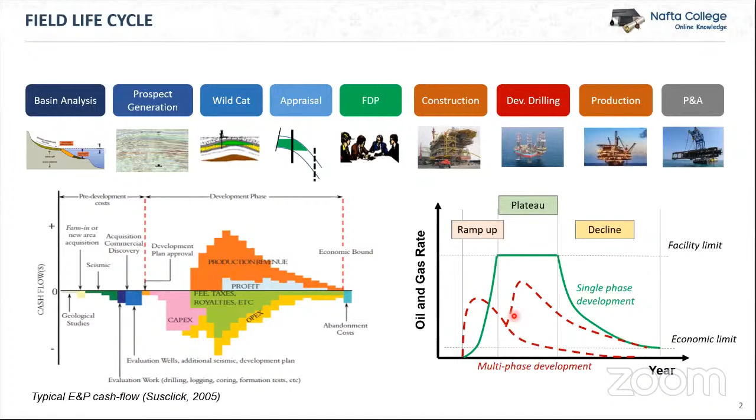So the discussion on reservoir management between the government and the oil company could be tough at some point, because it has to satisfy both interests, the short-term interest of the company and the long-term interest of the government. So there could be different strategies for achieving higher recovery over different time frames between the company perspective and the country perspective.

Reservoir management further tries to move more from the 2P and 3P categories to the 1P category. Throughout field life, as you apply good reservoir management, you will see better performance, so you will be able to book more 1P and more 2P instead of 3P. And that's exactly what defines the company's value in the market.

As you practice reservoir management, you could end up with higher 2P reserves and a higher reserve replacement ratio. You generate more reserves than what you produce, more than 100% RRR, which is good for the company. So you can see how a field operated with good reservoir management and without it could perform quite differently.

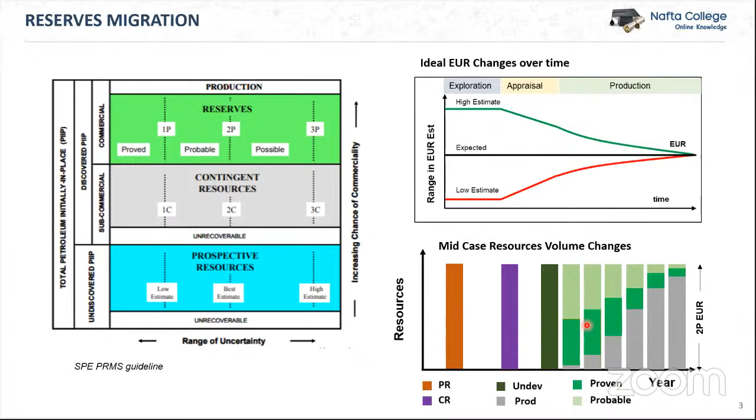Now, the bottom right here gives you an idea that in the mid case, you start with the prospective resource, you drill the appraisal well, exploration well, so you confirm it and it becomes a CR. We don't know if it's commercial or not to bring it to production. Then we go into the FDP, it gets approved, so you transfer the volume, it becomes undeveloped, and you start production. As time goes by, you can see production going up, and the proven getting smaller, but at the same time, it gets transferred from probable to proven. By what? By better field performance. And how are we going to get this better field performance? By applying proper or sound reservoir management.

Now, what actually is reservoir management? If you look at the literature, there are quite a number of definitions of what reservoir management is about. But I want to quote one definition from SPE 26289. They said that reservoir management is the use of financial, technological, and human resources while minimizing the capital investment, the capex, and operating expense to maximize the economic recovery of oil and gas from a reservoir.

So to me, there are three key words when we talk about reservoir management. The first one is about maximum value, the NPV out of the field. So how are we going to have the maximum NPV? Of course, you get the maximum recovery, the maximum reserve, and at the same time, the lowest cost possible. So cost becomes a very important element in the company's value or reserve, because with the low oil price, cost becomes quite a major factor.

And some companies write off their reserves because they don't sustain economic value whenever the price is quite low. Some of the unconventional resources in the US or Canada, for example, because shale oil has a long tail of production, had to cut reserves significantly because at that particular oil price, it's no longer economic. So we have to balance the cost as well as the reserve, with the end result being maximum value. So that's number one.

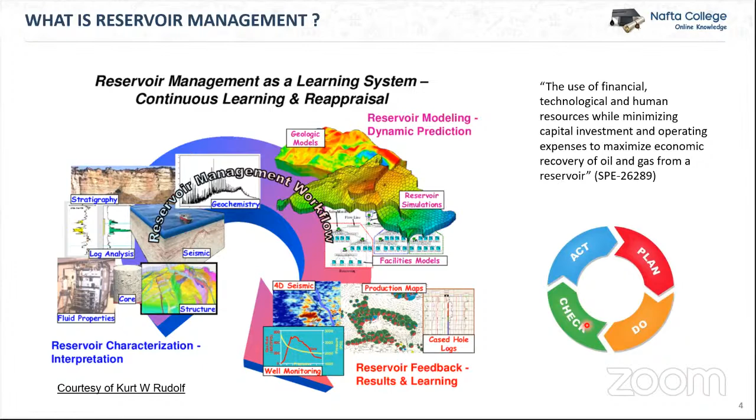Okay, ladies and gentlemen, let me take you through GOR management. This is one of the important aspects of reservoir management, especially on fields that are in a saturated reservoir or at the bubble point. So this becomes a very sensitive or very important issue between the government as well as the operating company, because the operating company's interest, of course, is to produce the oil as much as possible, as quick as possible. At the same time, the government is looking more at the long-term recovery.

And one of the variables to make sure that both interests are served is how you're going to manage the GOR. So the first one, let's say we have a case of depletion drive. So you don't have a gas cap, you don't have an aquifer, it's very weak or no aquifer at all. So normally in Malaysia, for example, the government applies the GOR limit of 1.5 Rsi. So if you start with a GOR of 500, for example, you're not allowed to produce more than 750 scf per barrel. If you produce more than that, you have to shut in the wells.

Why does the government apply this kind of GOR limit? Because they want to conserve the reservoir energy. That's a very obvious intention, because they don't want that when you produce very high GOR, the energy is depleted, and then you have poor reservoir recovery. Now, at the same time, we have to look at the benefit of doing pressure maintenance or the possibility of a secondary gas cap. So if you do water injection in this kind of reservoir, how much is the benefit? If there is quite a benefit, then there is merit for you to control GOR to some extent instead of, let's say, producing unlimited GOR.

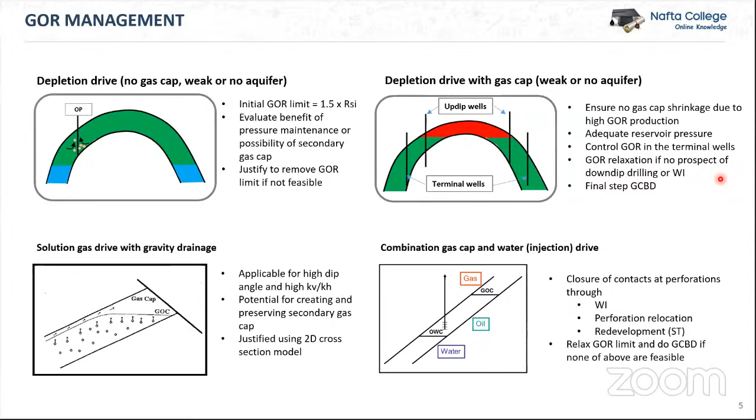Okay, now let's look a bit further at waterflood management. So this is focusing more on the waterflood. Now, in some cases, people say, okay, I want to inject as much as I produce, or in other words, your voidage replacement ratio is equal to 100%. Now, it could be correct for the case that you are in an undersaturated reservoir, there's no primary gas cap, you place your producer well at the top, so you're going to sweep the oil from the oil-water contact toward the crest all the way.

That could be true. But when we deal with a reservoir that has some gas cap, for example, typical of the reservoirs here in the Malay Basin or Sarawak Basin, you will need to allow the reservoir pressure to go down to some point. Why? Because you need to allow the gas cap to expand to push the up-dip oil to the producer well. Otherwise, that up-dip oil will never be produced if you inject exactly replacing what you produce, and you're just sweeping the down-dip oil.

Now, when you allow the gas cap to expand, the pressure will drop. At the same time, you also have to make sure that your artificial lift is able to keep producing the oil at the lower bottom hole pressure. And in some cases in my area, in deep water, for example, we didn't have gas lift, so we thought that the pressure would be maintained all the time, but actually there was a slight drop in pressure that caused the well to not be able to flow because the water cut started increasing. So we had to redo the project with additional gas lift. This is something that you have to think through even in the beginning.

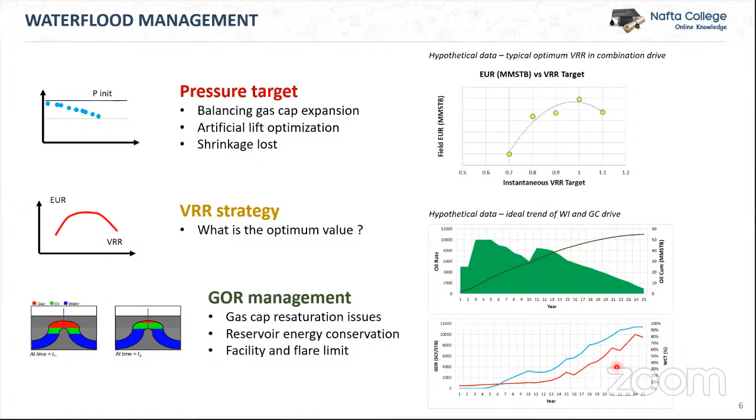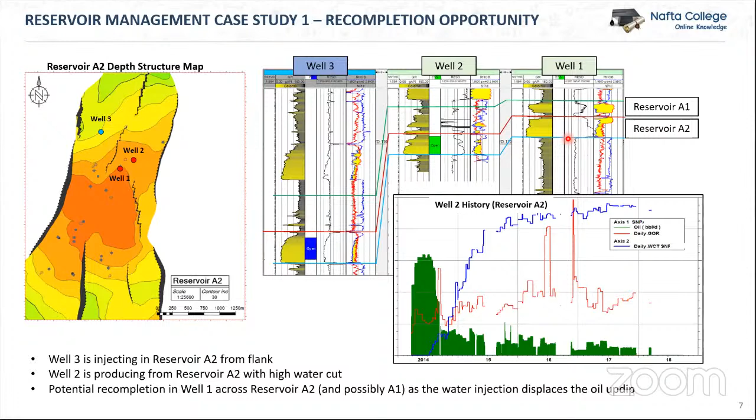And why would the gas cap be shrinking? It can be explained because in the past there was a well at the crest which accidentally produced the gas cap. We didn't know at that time it was connected to the reservoir. It was produced for a few months, then we realized that it's connected and we shut in that particular well. So the shrinking of the gas cap could be driven by that event of producing the gas cap. At the same time, you keep injecting from the flank, which could push the gas cap toward the crest.

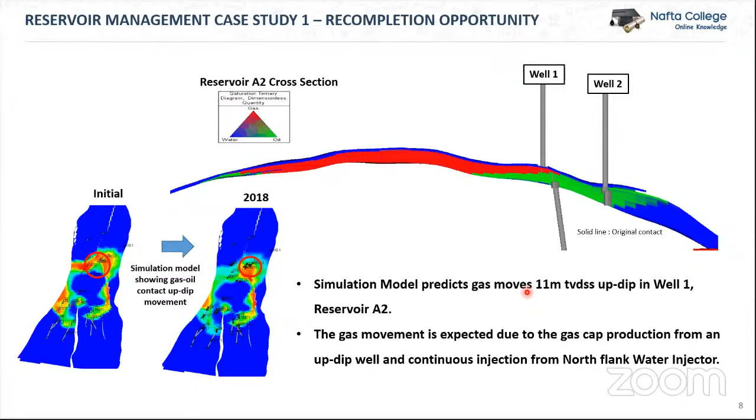So the model predicts that if you complete well number 1, you will have some oil and then some water at the base. That's what the simulation predicted. So then we ran the cased hole saturation log to understand whether it is really gas or oil or even water now in well number 1. So let me just take you through this log a bit.

This one here is the gamma ray. As you can see, you are dealing with quite a nice looking sand. And you can see the original neutron density, which is the gray area on the third track. You can see the separation between density and neutron. The same goes here. So this is your original gas oil contact. On the far right track here, this is the interpretation of the fluid at the original condition.

Then we ran the pulsed neutron tool, which is quite a good tool, to be honest, because we've tested different technologies for cased hole saturation to understand how they behave in the same well, and then we followed up with some action in the field and confirmed which one is more accurate. Now, the first curve that is run in the cased hole is called TPHI, still the neutron porosity, which is based on the hydrogen index.

As you can see, there is an increasing neutron or hydrogen index reading from the original, the gray one, to the purple one. The same goes here in reservoir A2. So there is a change from likely gas to liquid based on the TPHI or hydrogen index log at this particular level. So it could be that now it's not gas anymore from this reading.

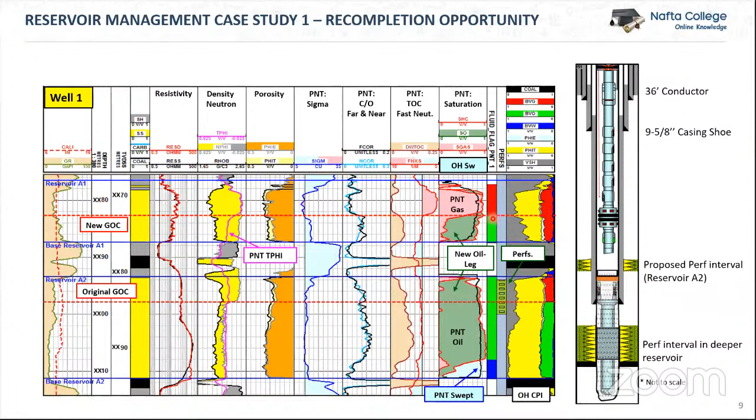So combining the gas identification and the oil water identification, we understand that in the current situation, the GOC has moved quite a number of meters here. So you still have gas left at the top, you have oil, most of it, and then you have water at the base. So with that, we recommended at the time to perforate the section over here to stay away from the water and to stay away from the gas at the same time.

So this is the cartoon to illustrate the original condition and then what you have in the current situation. So the water you've seen at the base, but this water is at a shallower depth compared to well 2 because we believe there's some encroachment or gravity override due to the high permeability at the base. So the gas oil contact has moved quite a number of meters from the original position.

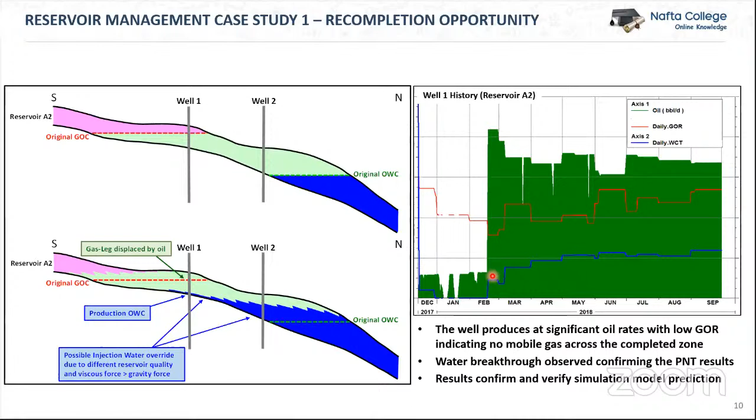Then we perforate, and this is the result of the well. So you can see that the GOR is very low, steady, meaning that there is no movable gas in that section that we perforated. And after some time, we also cut water as expected because you have water quite close to the bottom. So this is one example of a successful recompletion by understanding the reservoir behavior, as confirmed by the saturation log application.

Okay, now I'm going to case study number 2, and this is related to how we overcome the low injectivity issue. This is the production history of one field in my area. So you can see it's quite strong production, about 10,000, but then you don't have any water injection because we had a problem in water injection. You can see the GOR start increasing, there's no water production, and you have to cut back the production from 10,000 down to 5,000. And we are struggling here, GOR keeps increasing, and we don't have enough water injection. That is the situation that we had.

Now, when you look at the reservoir quality of the injection well, this is the log from the injection wells, you can see that they're actually not that bad. Even if you look at the MDT data, the pretest data, some of them actually show like 1 Darcy or 3 Darcy. That is quite high permeability. So theoretically, based on this reservoir quality, if you plug it into the nodal analysis, for example, you will get around 11,000 barrels of water injected at a certain wellhead pressure.

But in reality, it's only injecting about 3,000. Now, in the other injector, we estimated it should be injecting about 2,000, but it's not injecting at all. Zero water injection goes into this well. So what is actually happening in this reservoir? And this is a picture to show you that the gas cap has expanded because of no water injection for quite some time in this reservoir.

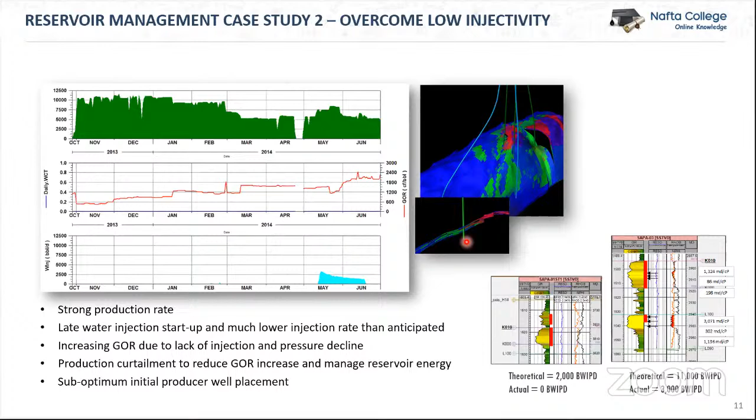Now, one of the learnings from this one also, we were too aggressive, putting the producer well too close to the gas oil contact, because we were thinking, okay, the simulation predicts everything, no issue. You can inject quite a volume of water, so there will be no gas cap expansion at all. It will not happen in the early times, so everything will push to the crest. But in reality, we have a problem with the injection water, and your producer well is too close to your gas oil contact and gasses out too quickly.

So in order to understand what happens in the reservoir, why we're injecting much less than what we anticipated, we went back to some data in our reservoir, first starting off with the rock mineralogy.

So what actually do we have in our reservoir? So we have XRD data here from the core. So you can see that quite an amount of clay across your sand. So the reservoir section contains quite a percentage of clay actually.

Now, if you look at the clay distribution within the total clay, about 1/3 of that is actually kaolinite, which is susceptible to fines migration, to move. And you also have illite and smectite, which can swell when in touch with water. So there could be some issue. Just looking at the rock mineralogy, it could be some clay swelling issue. It could be some fines migration coming from the kaolinite.

Then we also did the pressure testing. We do some injection fall-off tests, try to understand how the permeability observed from the pressure testing compares to the log analysis. And you can confirm that the permeability you get from the well testing is very low compared to what you expected from the log.

But there's indication it could be some dropping of the derivative at the end, and perhaps a new stabilization toward the end. There could be some radial composite behavior where you have very poor permeability, low permeability around the wellbore, and things getting better as you go away from the wellbore. That could be one of the interpretations. Of course, as you know, there could be different models that can fit the data.

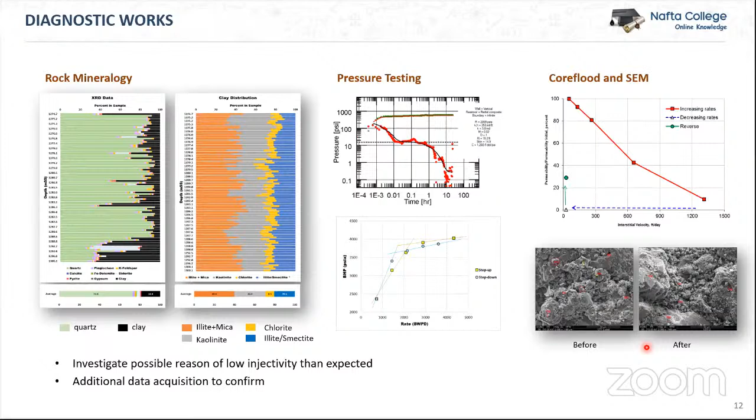Now, of course, the next question is, okay, we have fines migration, we have some issue on injection, so we have to do something about it, but how much is the benefit of removing this issue? So this is basically understanding how much value we protect if we were able to reinstate the injection rate as per design.

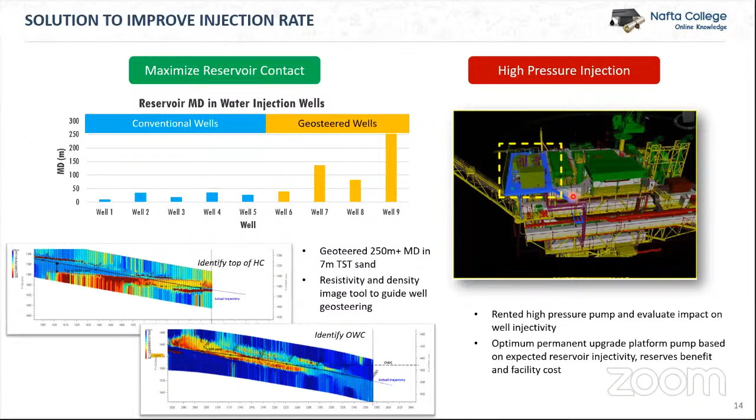So we used high pressure injection to achieve the target injection rate and get the proper support for our producing wells. So with that, we managed to increase the injection rate from 3,000 up to 20,000. And the oil production rate, from the 10,000 initial, dropped to 5,000 and went back up to 15,000 and was steady for the next 3 years after that intervention. It's quite a good story that reinstating the injection in this particular field is confirmed to give a very big value, or protect the big value, for the company.

So we want to understand, because the GOR in this well A keeps increasing over time. So where is the GOR coming from? Is the gas cap expanding, or is the injector in the north pushing the gas cap to the south? Are we getting support from the southern injector or not?

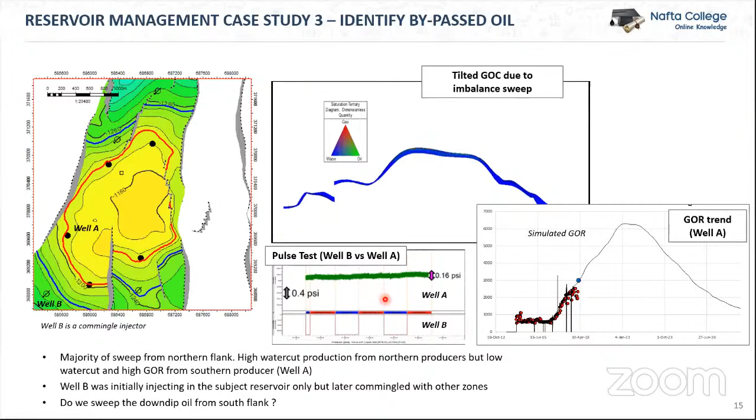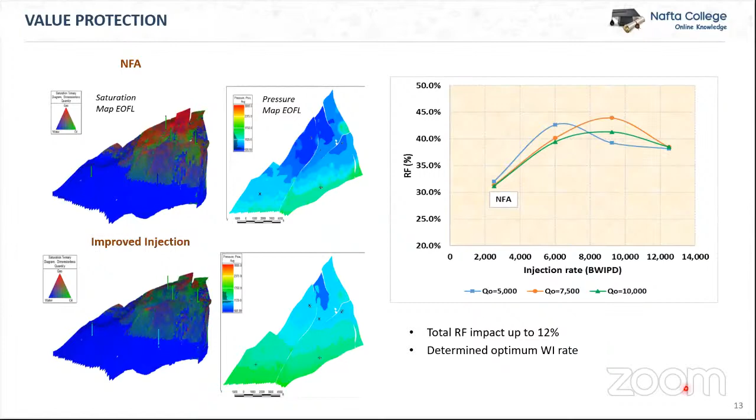Last case. Right. Okay, now for the reservoir management for this, we came to the government and said that there's no way we can produce this reservoir while adhering to some GOR limit. Because at some point when you inject from the north and try to push the oil toward the south, it's unavoidable that you will produce the gas at the same time, because the gas cap will be tilted, some of it will be pushed toward the producer well in the south.

So the consequence of doing that strategy is that you will produce high GOR. So because of that, we came to the government and said that there's no way we can restrict the GOR, and we have to have no GOR limit, but we have to make sure that the pressure is relatively maintained. And how we're doing that is you have enough injection water, because this is a high permeability rock, so it's not an issue.

So you inject the water consciously at a higher rate and push the oil and gas to the south, and you produce oil together with the high GOR. So in this case, there is no GOR limit applied.

All right. Thank you very much. And I think it will be the last question. And it seems like this is the question for me. For the MRT technology, how do we know or prove that the mathematical equations work correctly? Is it a non-unique solution like PTA? True. That is a very reasonable question.

So, of course, as with any other inverse task, the solution is non-unique, and we have several ways which we've developed over the years on how to restrict the area where we're trying to find the solution. So it would be the most probable solution, let's say. So this technology has been tested many times beforehand, and we have numerous papers in SPE.

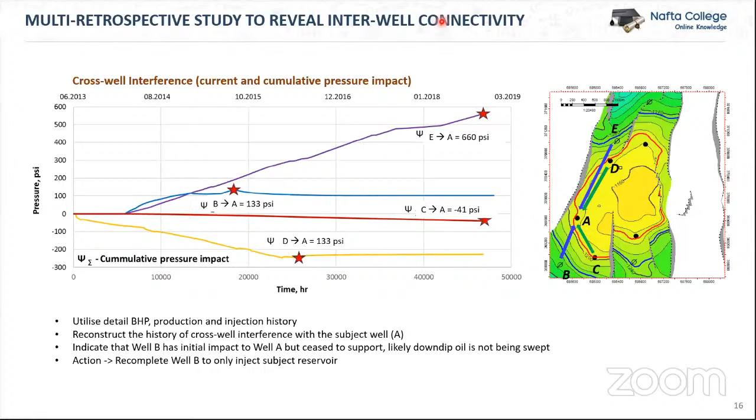And by the way, the last SPE paper, which is precisely on how this technology was tested, is being published right now after the OTC, which I believe closes today. Right. So please refer to the paper, and in the paper we describe how we tested this algorithm together with the client and made sure it actually works.